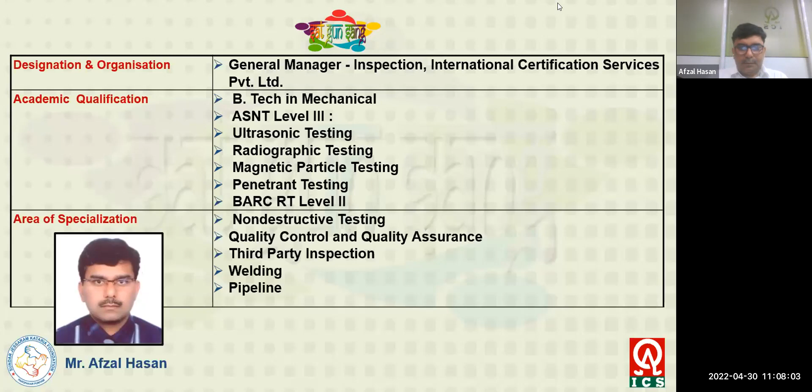Thank you for giving the introduction. I'm presenting my PPT. I hope you have my screen. Yes, yes.

Welcome to the session on introduction to the Static and Mobile Pressure Vessel Rule 2016, SMPV Rule 2016. As per the SMPV Rule 2016, the pressure vessel definition is defined.

Pressure vessel means any closed metal container of whatever shape intended for storage or transport of any compressed gas, which is subjected to internal pressure and whose water capacity exceeds 1,000 liters, and includes interconnecting parts and components thereof up to the first point of connection to the connected piping and fittings.

So this is the definition. The pressure vessels falling under this rule means vessels with less than 1,000 liter capacity do not fall under the SMPV Rule 2016.

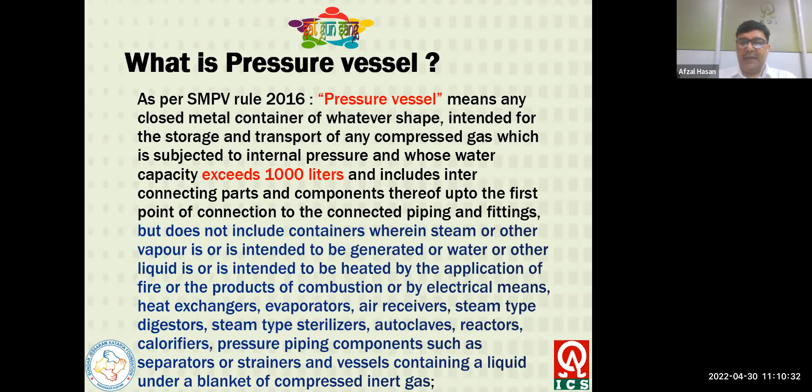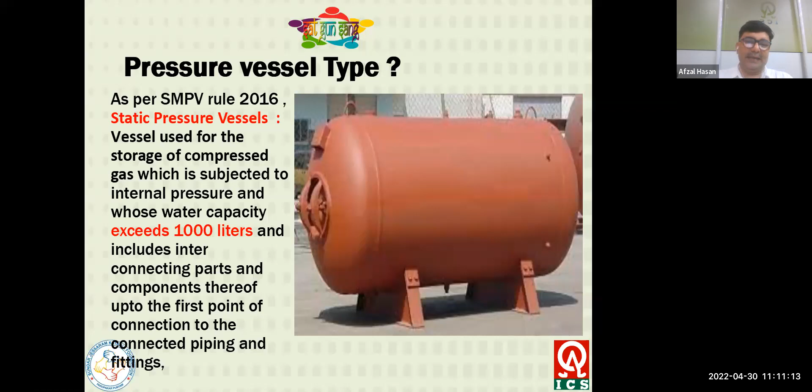Types of pressure vessels: as per the SMPV Rule 2016, these are basically categorized into static pressure vessels and pressure vessels used for transportation. The static pressure vessel is used for storage of compressed gas, subjected to internal pressure, whose water capacity exceeds 1,000 liters, and includes interconnecting parts and components thereof up to the first point of connection to the connected piping and fittings. This relates to static pressure vessels.

Mobile pressure vessels: every vessel used for transportation of compressed gas is a mobile pressure vessel. Pressure vessel types: there are four most common pressure vessels based on shape - cylindrical, spherical, and horizontal and vertical pressure vessels.

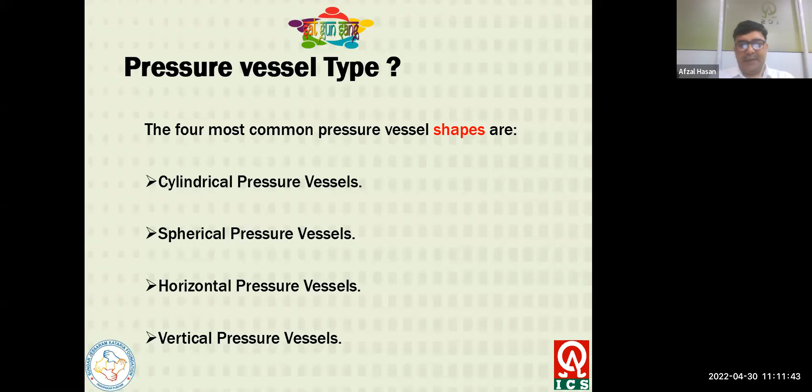Another type based on shape and design is called mounded bullets. Mounded bullets are horizontal pressure vessels intended for the pressurized storage of liquid petroleum gas at ambient temperature.

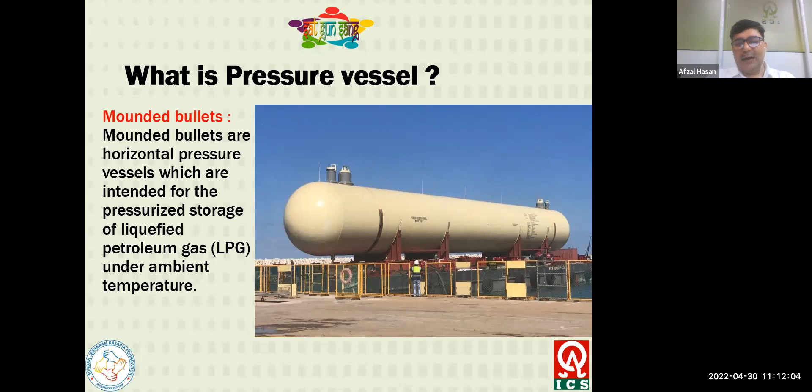Horton sphere: the Horton sphere is a spherical pressure vessel used for storage of compressed gas such as propane, liquid petroleum gas, or butane in the liquid gas stage.

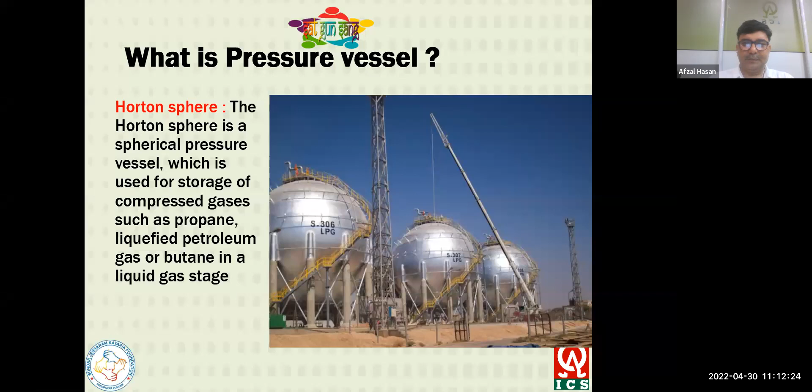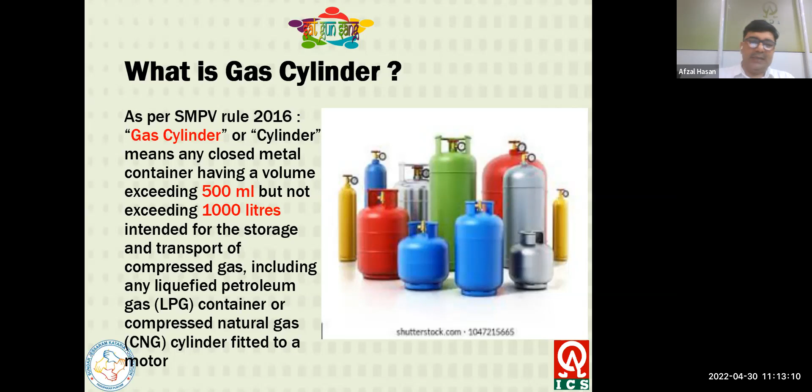What is the cylinder? As per the SMPV rule 2016, they have differentiated between the gas cylinder and the pressure vessel. The rule defines what falls under the gas cylinder and what falls under the SMPV rule 2016. Gas cylinder means any closed metal container having a volume exceeding 500 milliliters but not exceeding 1000 liters, intended for the storage and transport of compressed gas, including any liquefied petroleum gas container or compressed natural gas cylinder fitted to a motor vehicle. So this is the differentiation between the pressure vessel and gas cylinder.

What is a cryogenic pressure vessel? According to the SMPV rule 2016, cryogenic pressure vessel means a pressure vessel intended for storage and transportation of cryogenic liquid, and includes cold converters, vacuum insulated evaporators, vacuum insulated storage or transport tanks, and thermosiphon tanks, and includes a permanently installed cryogenic pressure vessel of 1000 liter water capacity or less for storage of cryogenic liquid.

What is cryogenic liquid? It means a liquid form of a permanent gas having a normal boiling point below minus 150 degrees centigrade. So a cryogenic liquid that evaporates below minus 150 degrees centigrade is called cryogenic liquid. Examples: nitrogen, helium, hydrogen, argon, methane, and carbon monoxide are examples of cryogenic liquid.

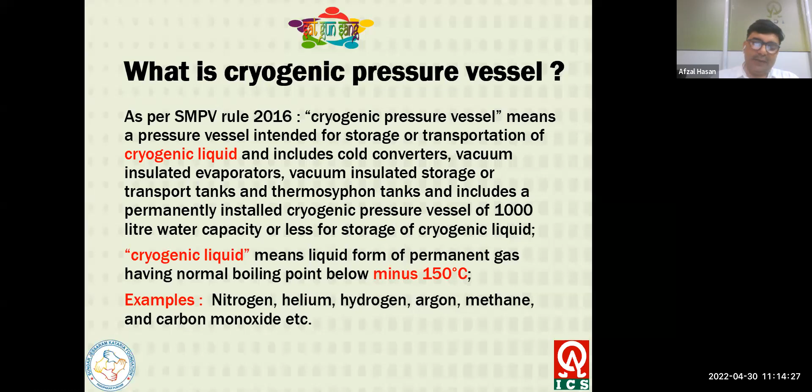Vacuum insulated vessels are used for the storage and transportation of cryogenic liquids. Basically, insulation is provided by a vacuum between the two shells. The inner shell is the storage vessel and the outer shell provides shielding to prevent heat transfer, restricting heat.

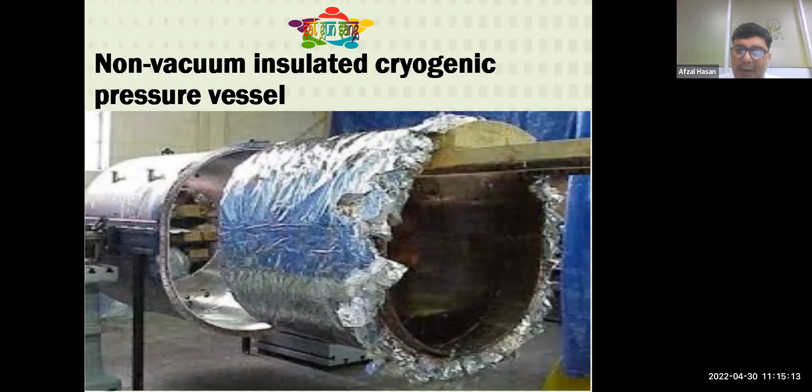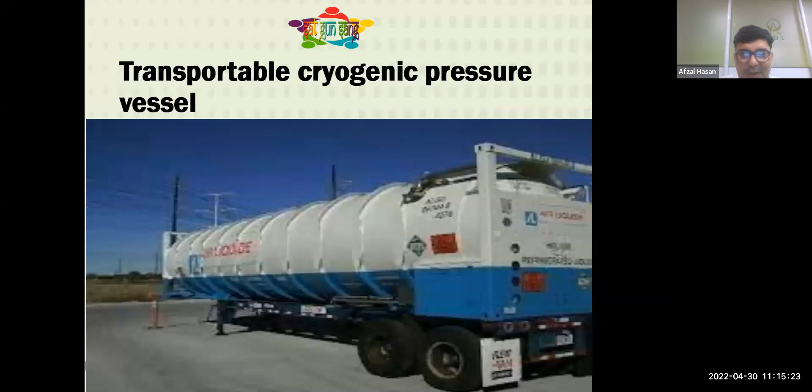Non-vacuum insulated vessels have insulation material provided on the inner and outer vessels. Static vertical cryogenic pressure vessels and transport cryogenic pressure vessels are other types.

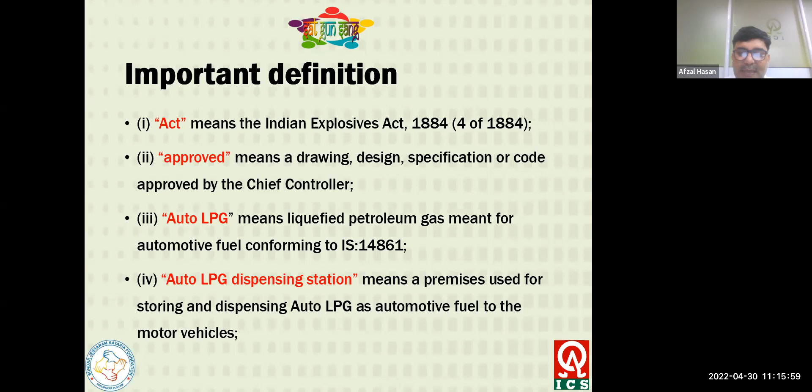Important definitions given in the SMPV rule 2016: Act means the Indian Explosive Act 1884. Approved means the drawing, design, specification, or code approved by the Chief Controller. Auto LPG means liquefied petroleum gas meant for automotive fuel, conforming to IS 14861. Auto LPG dispensing unit stations mean premises used for storing and dispensing auto LPG as automotive fuel to motor vehicles.

As per the SMPV rule 2016, compressed gas is defined as any permanent gas, liquefied gas, or cryogenic liquid under pressure, or gas mixture, which in a closed pressure vessel exerts a pressure exceeding 1 atmospheric gauge pressure at the maximum working temperature, and includes hydrogen fluoride. In case of a vessel without insulation or refrigeration, the maximum working temperature shall be considered as 55 degrees centigrade. This means if the working temperature of the gas stored in the vessel is more than 55 degrees centigrade, it does not fall under this rule.

Critical temperature means the temperature above which the gas cannot be liquefied by application of pressure alone. Cryogenic liquid means liquid form of a permanent gas having a normal boiling point below minus 150 degrees centigrade.

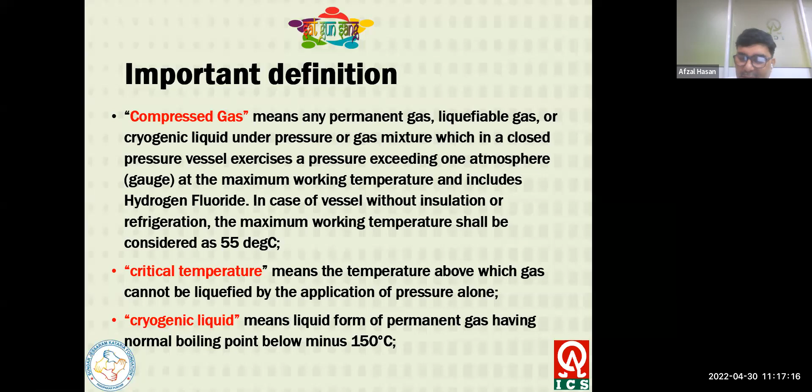Restriction on filling, manufacture and import of the pressure vessel, including fittings and vaporizers: No person shall fill any compressed gas in any vessel, or transport any vessel filled with compressed gas, unless such vessel has been manufactured in accordance with the type, standard, or code specified under Rule 13, and fitted with fittings approved by the Chief Controller.

No person shall manufacture any vessel and its fittings under sub-rule 1, including vaporizers, without prior approval of the Chief Controller. Any person seeking approval of his fabrication shop for fabrication of pressure vessels, vaporizers, or fittings under the sub-rule must follow the restrictions on filling and manufacturing.

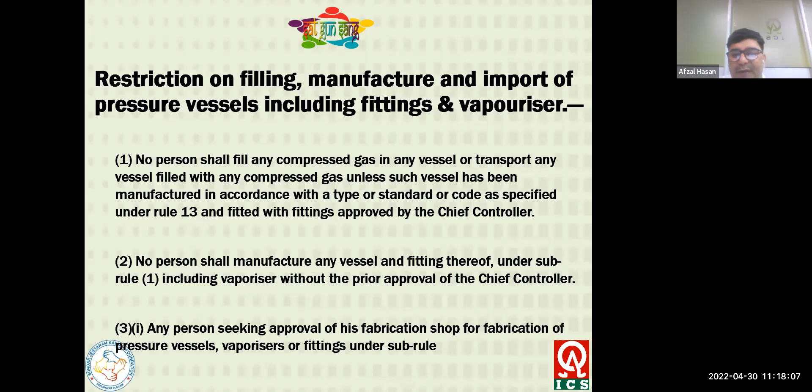Restriction on filling and manufacturing import of pressure vessel, including fitting and vaporizer, shall submit particulars specified in Appendix First to these rules, a copy of ISO certification or equivalent certification in respect of the fabrication shop, and the scrutiny fee specified in clause B of the schedule.

The Chief Controller, on receipt of documents mentioned in clause 1, shall get the fabrication shop inspected by the controller for assessment of capability for fabrication of pressure vessels and vaporizer fittings, and shall either approve the shop or reject the application depending upon the assessment report. The approval shall remain valid initially for a period of 1 year. No person shall import any vessel without prior approval from the Chief Controller.

Restriction on delivery and dispatch. No person shall deliver or dispatch any compressed gas filled in the vessel to any person other than the holder of storage license issued under these rules, or to a port authority or railway administration. No compressed gas delivered or dispatched under this sub-rule shall exceed the quantity which the person to whom it is delivered or dispatched is authorized to store under the license held by him.

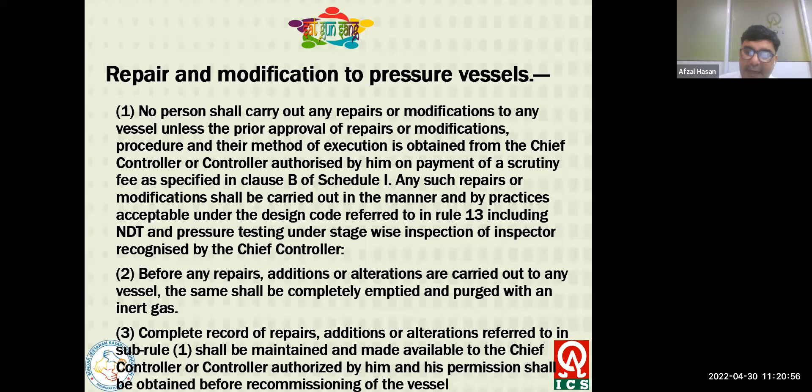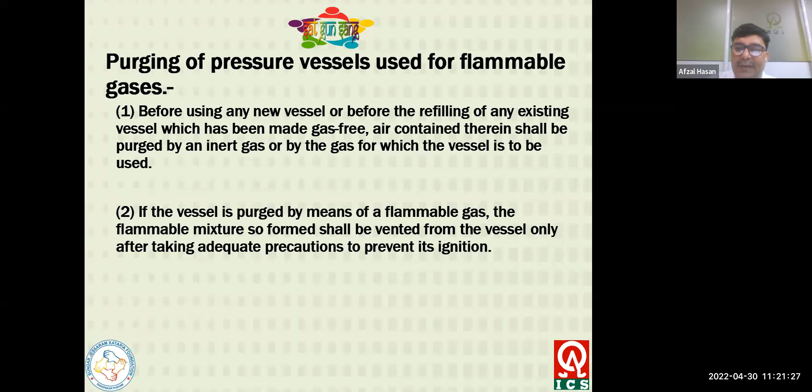Purging of the pressure vessel for use with flammable gases. Before using any new vessel, or before refilling any existing vessel which has been made gas free, the air contained therein shall be purged by inert gas or by the gas for which the vessel is to be used. If the vessel is purged by means of flammable gas, the flammable mixture so formed shall be vented from the vessel only after taking adequate precautions to prevent ignition.

Prohibition of employment of children and intoxicated persons. No person under the age of 18 years, or who is in a state of intoxication, shall be employed for the loading, unloading, or transport of any vessel containing compressed gas, or in any premises licensed under these rules.

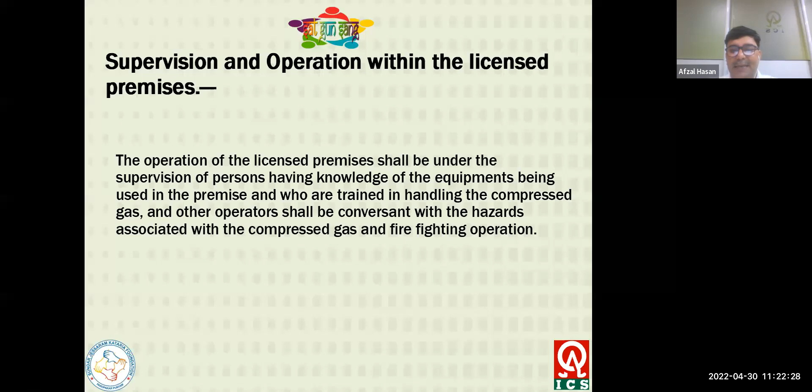Supervision and operation within the licensed premises. Operations of licensed premises shall be under the supervision of persons having knowledge of the equipment being used in the premises and who are trained in handling compressed gas. Other operators shall be conversant with the hazards associated with compressed gas and firefighting operations.

Special precautions against accidents. No person shall smoke, bring any matches or fire or articles capable of causing ignition, or commit or attempt to commit any act which may tend to cause fire or explosion, in or about any place where compressed gas is stored, handled or transported in vessels.

All empty vessels which had contained any flammable or toxic gases shall, except when opened for purpose of filling, cleaning, or rendering them gas free, be kept securely closed until they have been cleaned and freed of the gas, as the case may be.

Every person storing compressed gas in a vessel, and every person in charge of or engaged in the storage, handling, or transportation of such gas in the vessel, shall at all times comply with the provisions of these rules and conditions of any license issued thereunder, observe all precautions for the prevention of accident by fire or explosion, and prevent any person from committing any act referred to in this rule.

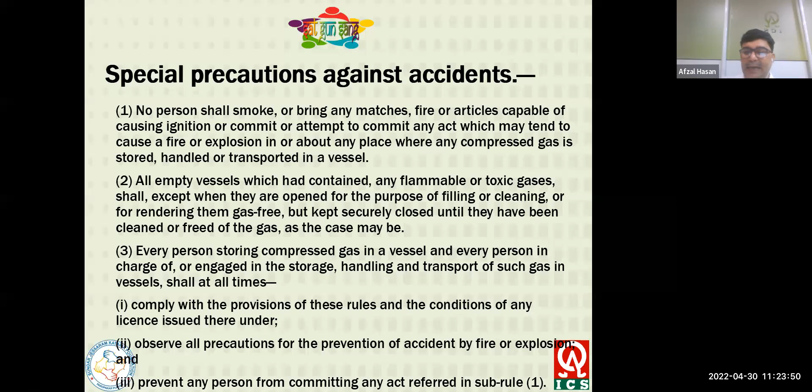Design code of the pressure vessels. Vessels shall be designed, constructed, and tested in accordance with IS 2825, ASME Section 8 Division 1, Division 2, PD 5500, EN 13458 and EN 13530, AD 2000, as the code is amended from time to time, or such other standard or code accepted by the Chief Controller.

A test and inspection certificate issued by the inspector and countersigned by the approved fabricator, in the prescribed format, stating that the vessel meets the requirements of the standard or code referred to in sub-rule 1, shall be furnished to the Chief Controller or controller authorized by the Chief Controller.

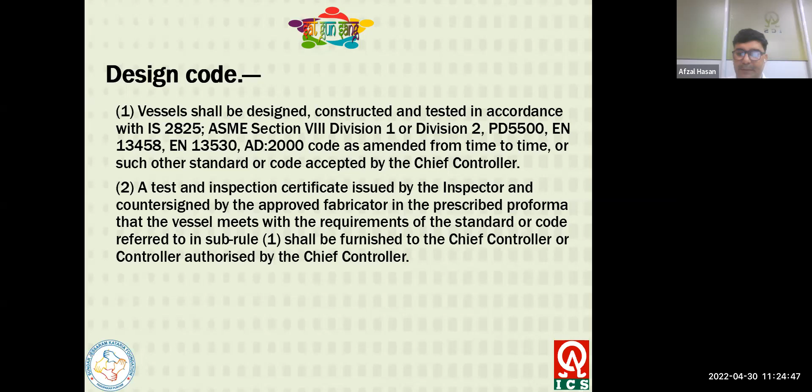Design pressure of the vessel shall not be less than the vapor pressure of the gas in the vessel at 55 degrees centigrade, or the developed pressure of the gas in the vessel at 55 degrees centigrade if the vessel is meant for storage of permanent gas, or the maximum allowable service pressure with additional allowances for vacuum, static head, and stresses due to acceleration or deceleration, as the case may be, in respect of cryogenic liquid proposed to be stored or transported.

Static head of the water column or compressed gas column shall also be considered for the static pressure vessels. Wind load and seismic load shall also be considered for vertical cylindrical vessels and Horton spheres.

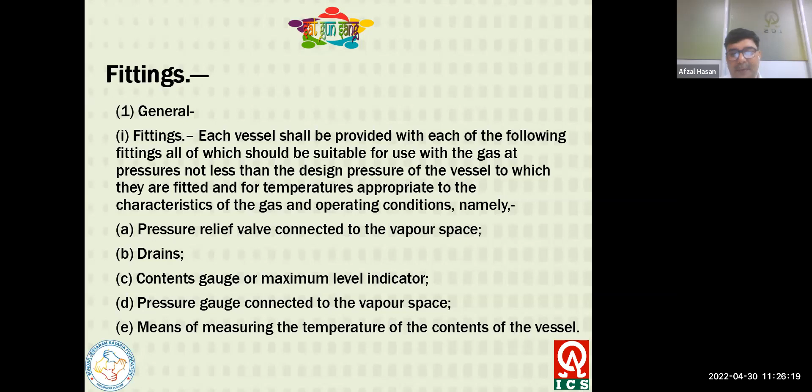Fittings: each vessel shall be provided with each of the following fittings, all of which should be suitable for use with gas at a pressure not less than the design pressure of the vessel to which they are fitted, and temperature appropriate to the characteristics of the gas and operating condition, namely pressure relief valve connected to the vapor space, drains, content gauge or maximum level indicator, pressure gauge connected to the vapor space, and means to measure the temperature of the content of the vessel.

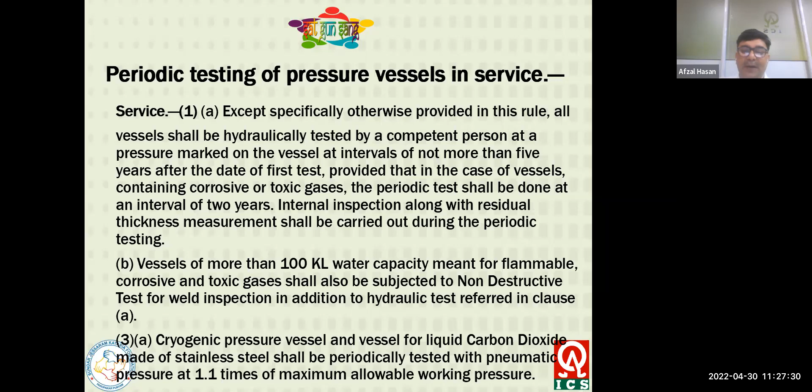Periodic testing of the pressure vessel in service stage. Except where specifically otherwise provided in this rule, all vessels shall be hydraulically tested by a competent person at a pressure marked on the vessel at an interval of not more than 5 years after the date of first test, provided that in the case of vessels containing corrosive or toxic gases, periodic tests shall be done at intervals of 2 years. Internal inspection along with residual thickness measurement shall be carried out during the periodic testing. Vessels of more than 100 kL water capacity meant for flammable, corrosive and toxic gases shall also be subjected to non-destructive testing for weld inspection in addition to the hydraulic test referred to in this clause. Cryogenic vessels, pressure vessels, and vessels for liquid carbon dioxide made of stainless steel shall be periodically tested by pneumatic pressure at 1.1 times the maximum allowable working pressure.

Periodic testing of the pressure vessel in service. Carbon dioxide storage and transport vessels made of carbon steel shall be subjected to hydraulic testing instead of pneumatic testing at the marked test pressure as per the design and fabrication code. It shall be ensured that the vessel, after testing, is thoroughly dried of water and made moisture free before being taken into service. Ammonia Horton sphere shall be subjected to first periodic inspection after 2 years of its installation, and the inspection shall consist of detailed non-destructive testing of the vessel. Second periodic inspection shall be carried out after 3 years of the first inspection, and shall involve non-destructive testing and hydro testing of the sphere.

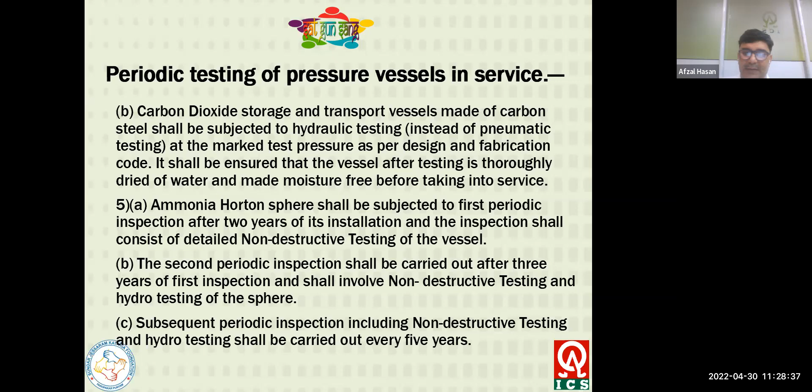Subsequent periodic inspection, including non-destructive testing and hydro testing, shall be carried out every 5 years. Notwithstanding anything mentioned in clause A of rule 3, 4, 5 above, the licensee is at liberty to carry out the hydraulic test as per the design code during the periodic inspection under rule 19. A competent person shall carry out the test as required under sub-rule 1 to sub-rule 6, and shall issue the online certificate of the test in the prescribed format, along with all the annexures giving the details of the NDT inspection prescribed above.

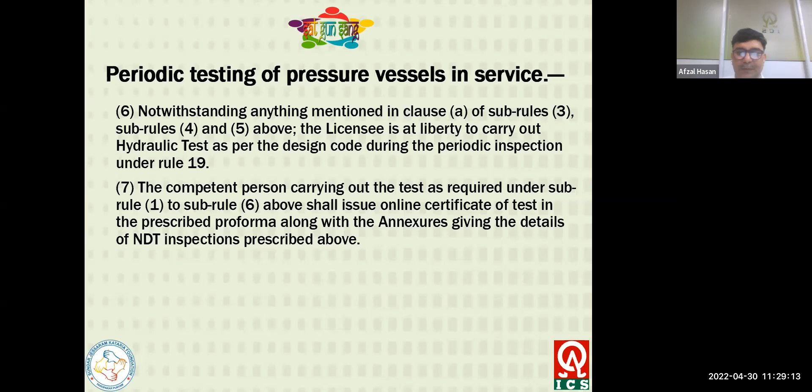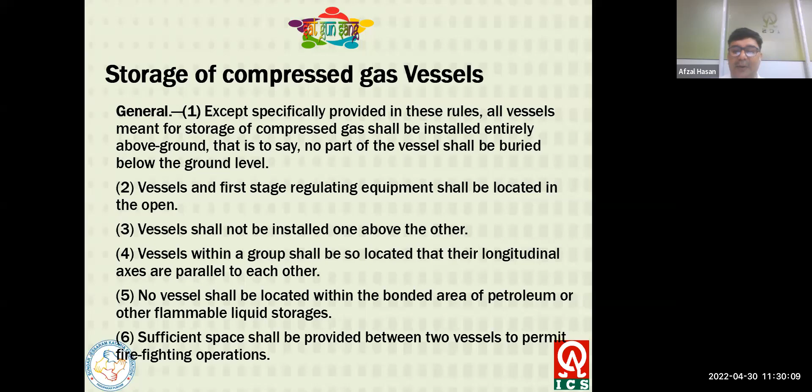Storage of compressed gas vessels - general requirements. Except where specifically provided in these rules, all vessels meant for storage of compressed gas shall be installed entirely above ground, that is to say, no part of the vessel shall be buried below ground level. Vessel and first stage regulating equipment shall be located in the open. Vessels shall not be installed one above the other. Vessels within a group shall be so located that their longitudinal axes are parallel to each other. No vessel shall be located within the bunded area of petroleum or other flammable liquid storages. Sufficient space shall be provided between two vessels to permit firefighting operations. Two or more vessels installed in batteries shall be so installed that the top surfaces of the vessels are on the same plane.

Vessels with their dished ends facing each other shall have a screen wall between them. Notwithstanding anything contained in rules 1 to 8 above, vessels for storage of liquefied petroleum gas (LPG) and other liquefied compressed gases can be placed underground, covered by earth, conforming to national or international standards acceptable by the Chief Controller and the requirements specified in Schedule 3. Above ground vessels for storage of corrosive, flammable, or toxic gas in the liquefied state shall be provided with an enclosure wall all around the ground. Minimum separation distance between the vessel and sump shall be the diameter of the vessel in case of a vessel with water capacity not exceeding 40,000 liters, or 15 meters if the water capacity of the vessel exceeds 40,000 liters. A corrosion allowance of minimum 1.5 mm shall be provided for vessels made of carbon steel.

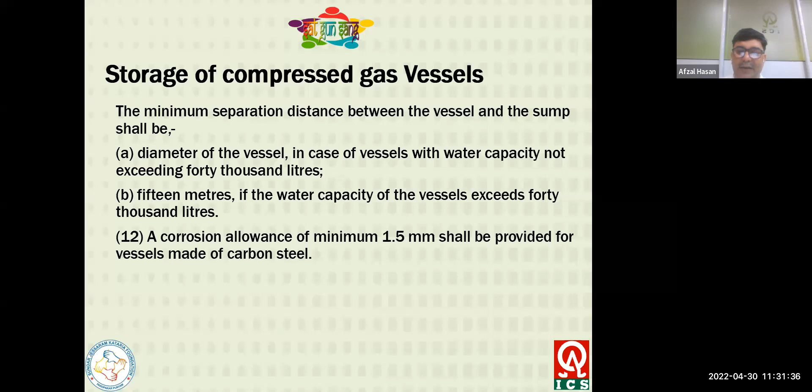Minimum safety distance for non-corrosive and non-flammable or non-toxic gases. Water capacity in liters not above 1,000 liters. Minimum distance from the building or group of buildings or line of adjoining properties should be 5 meters, and minimum distance between the pressure vessels shall be 1 meter.

If the capacity is more than 1,000 liters and less than 10,000 liters, the interdistance between the building and pressure vessels should be 10 meters, and minimum distance between the vessels should be 1 meter. If the capacity of the vessel is more than 10,000 to 20,000 liters, minimum distance should be 15 meters between the building and pressure vessels, and between the vessels should be 1.5 meters.

If the capacity is more than 20,000 and less than 40,000, the interdistance between the building and the pressure vessels shall not be less than 20 meters, and the distance between the pressure vessels should be minimum 2 meters, not less than 2 meters. Above 40,000 liters capacity, the interdistance between the building and pressure vessel should be 30 meters, and the interdistance between vessels should be minimum 2 meters.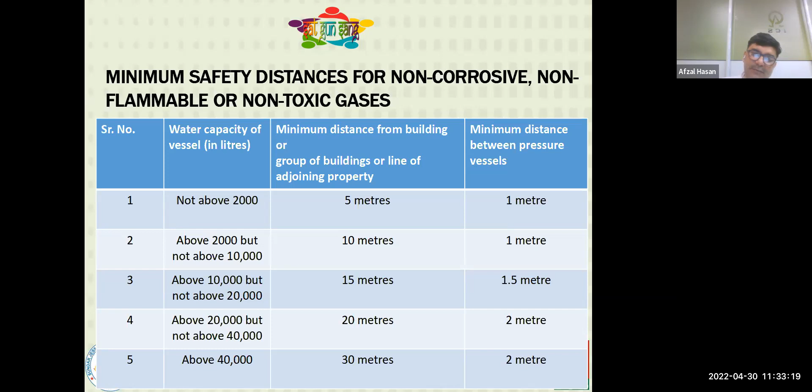This is another table related to the minimum safety distance for non-corrosive, non-flammable or non-toxic gases. This table talks about the same method: capacity, interdistance between the building and vessels, and distance between the pressure vessels. For storage capacity up to 2,000 liters, the minimum interdistance between the building and vessel should be 5 meters, and interdistance between the pressure vessels should be 1 meter. Above 2,000 liters to 10,000 liters, interdistance between the building should be 10 meters, and minimum distance between vessels should be 1 meter.

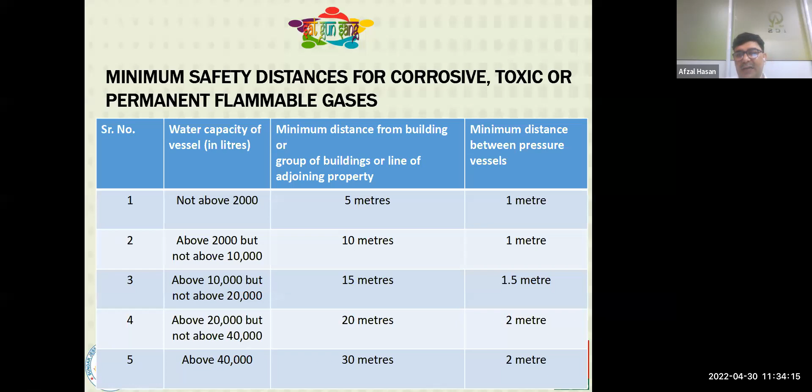So this table talks about the interdistances between the building and between the pressure vessels based on the capacity for corrosive and toxic or permanent flammable gases.

This table talks about the safety distances required for liquefied flammable gases according to capacity. Up to 2,000 liters, minimum distance from the building or group of buildings or line of adjoining properties: if the vessel is above ground, the interdistance should be 5 meters. If the vessel is above ground or underground but mounted, the interdistance can be reduced up to 3 meters, not less than 3 meters. So based on above ground and mounted, they have categorized it into two categories. Interdistance has been reduced when mounting is provided.

Minimum distance between the pressure vessels is accordingly categorized in two methods, based on above ground and based on mounting provided, whether above ground or underground. So the interdistance has been reduced where mounting is provided.

For above ground vessel capacity above 2,000 liters but not above 7,500 liters, the above ground vessel interdistance should be 10 meters for any building or adjoining properties, or if the pressure vessel is mounted, the interdistance can be reduced up to 3 meters. Accordingly, the interdistance between pressure vessels shall be 1 meter, whether above ground or mounted.

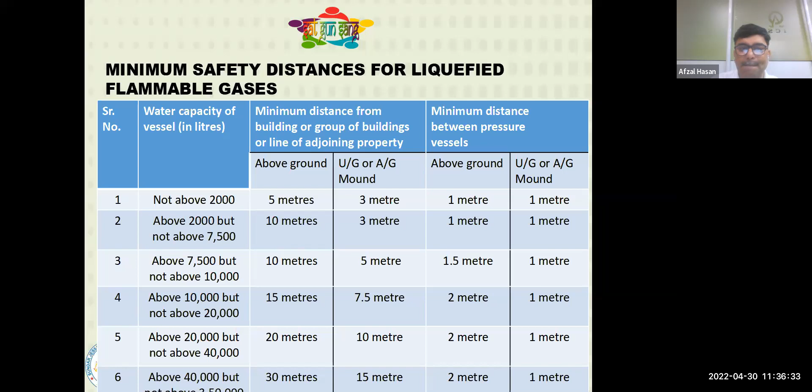Minimum safety distances between facilities associated with the storage of liquefied flammable gas in the petroleum refinery, gas processing plant, storage terminal, and bottling plant. They have given Table 4 according to the capacity, interdistance between the buildings, and interdistance between equipment to equipment, covering all facilities. So Table 4 talks about the required minimum interdistances for safety.

Table 5, mentioned in the rule 2016, gives the minimum safety distance in meters between the facility associated with the storage and dispensing of liquefied petroleum gas in the liquefied petroleum gas dispensing station, as automotive fuel to the motor vehicle. So this table talks about the interdistance required between facilities provided at LPG dispensing stations.

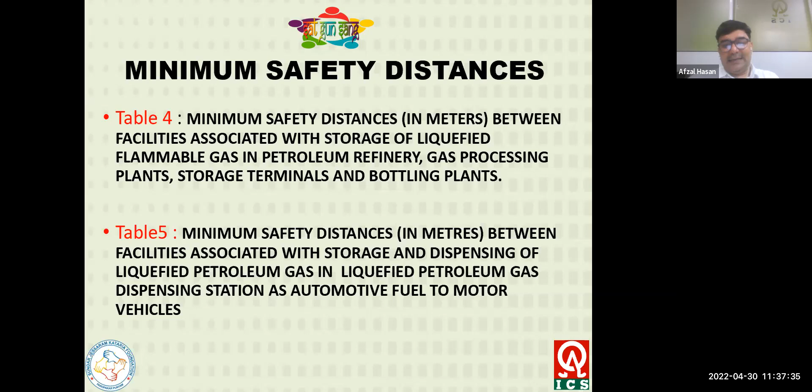Table 6 talks about the minimum safety distance for non-flammable, non-toxic cryogenic liquid and liquid nitrogen oxide. Table 7 gives the minimum safety distance for liquid carbon dioxide. So these numbers of tables are defined in the SMPV rule 2016 for safe distances.

Earthing requirement for the pressure vessels. All vessels used for the storage of flammable compressed gas shall be electrically connected with the earth in an efficient manner. Pipelines conveying the flammable liquid shall be adequately prepared for electrical continuity and connected with the earth in an efficient manner.

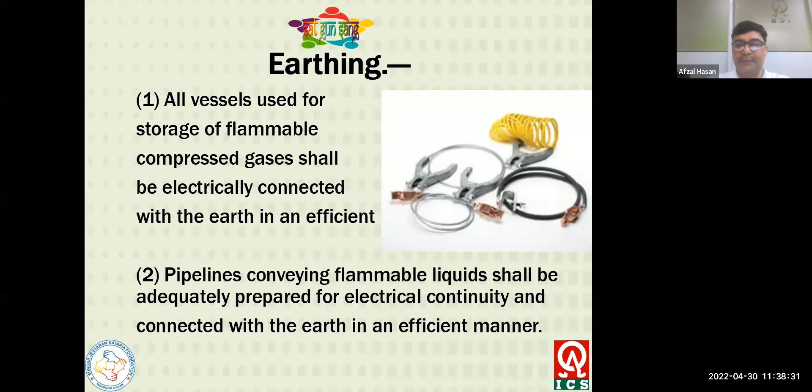Fire protection requirement: all vessels used for the storage of flammable compressed gases shall be protected against fire hazards. Provision shall be made for the adequate supply of water for fire protection in the storage area, in accordance with the rules and regulations applicable in the area.

Application of water may be by hydrant, hose and mobile equipment, fixed monitor or fixed spray system, which may be automatic. Control of water flow should be possible from outside any dangerous area. The firefighting system shall be designed with the medium velocity. Sprinklers for above ground storage vessels, filling sheds, loading and unloading areas, and pump sheds shall have a minimum spray density of 10 liters per minute per square meter for the single largest risk area, with additional requirement for hydrant points.

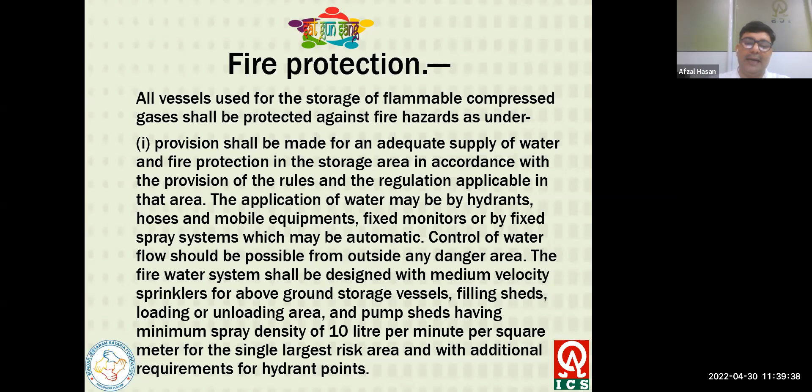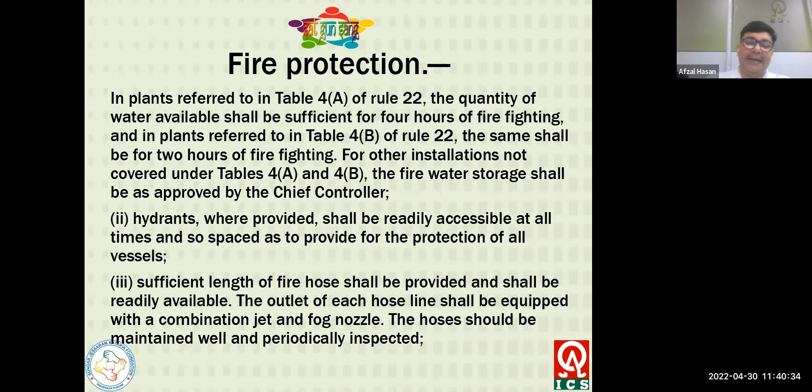The fire water storage shall be approved by the chief controller. Where provided, hydrants shall be readily accessible at all times, so spaced as to provide protection for all vessels. Sufficient length of fire hose shall be provided and shall be readily available. The outlet of each hose line shall be equipped with a combination of jet and fog nozzles, and the hose should be well maintained and periodically inspected.

Mobile equipment, fixed monitors or fixed spray systems shall be designed to discharge water at a rate sufficient to maintain an adequate film of water over the surface of vessel supports under fire conditions. Consideration shall be given to the provision of mobile or fixed water spray systems giving suitable and effective protection for vehicle loading and unloading areas.

At least 2 dry chemical powder type fire extinguishers of 9 kg capacity each shall be installed at each point of access to the installation. In a liquefied petroleum gas dispensing station for filling motor vehicles having only underground and earth covered mounted LPG storage vessels, 2 units of 70 kilogram dry chemical type fire extinguishers shall be provided. This is the requirement for auto LPG dispensing station fueling of motor vehicles.

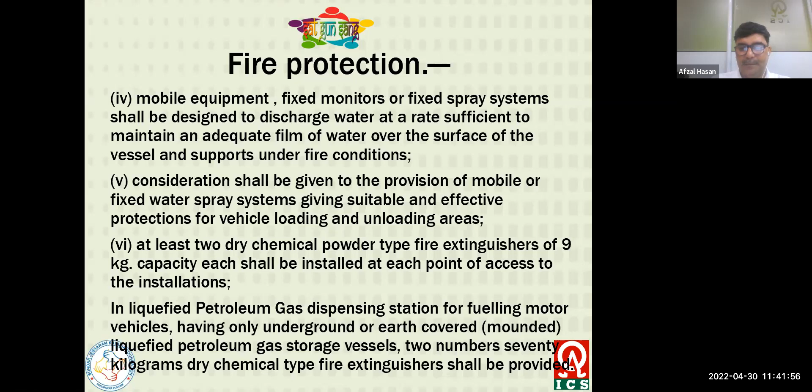Dispenser for auto LPG dispensing station: the dispenser and connected fittings used for dispensing auto LPG in motor vehicles, provided in the auto LPG dispensing station, shall be designed, constructed, tested and maintained in accordance with the requirements laid down in Schedule 2 of this rule, and shall be of a type approved in writing by the chief controller.

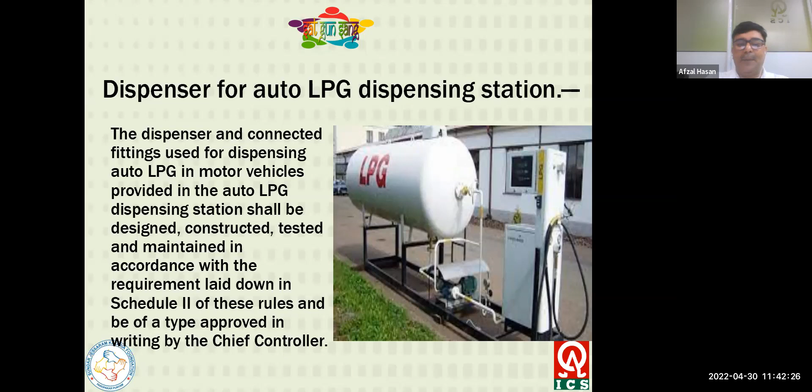Special provision for filling fuel tanks of motor vehicles and unloading of tank trucks in auto LPG dispensing stations: auto LPG shall not be filled in the fuel tank of a motor vehicle while the engine is running. During the period of unloading auto LPG from the tank truck to the storage vessel, operation of dispensing auto LPG to motor vehicles shall not be carried out.

Auto LPG dispensing station storage capacity requirements as per this rule: maximum water capacity of an individual vessel shall be limited to 20 cubic meters. The number of vessels shall not exceed 2 in an installation, and shall be designed for a pressure of not less than 14.5 kg per square centimeter. Not more than 2 unloading road tankers shall be undertaken at the dispensing station per day.

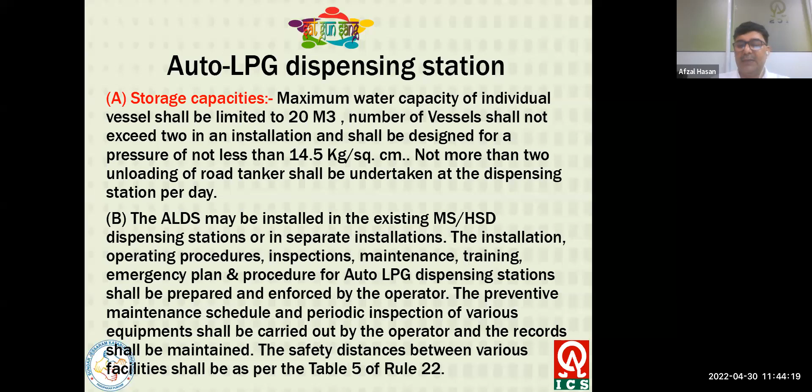Auto LPG dispensing stations may be installed in existing MS and HSD dispensing stations or as a separate installation. Installation, operating procedure, inspection, maintenance, training, and emergency plan procedures for auto LPG dispensing stations shall be prepared and enforced by the operator. Preventive maintenance schedules and periodic inspection of various equipment shall be carried out by the operator and records shall be maintained. Safety distances between the various facilities shall be as per Table 5 of Rule 22, which is applicable for the interdistance between facilities provided at the auto LPG dispensing station.

Mobile tanker unloading for the ALDS shall be done using a hose with automatic closing arrangement on both ends, called the smart hose. This means the inside volume held at both ends should not be vented. They have a provision that if you want to disconnect the hose, it should be closed so that no release of liquid LPG takes place at the end of unloading. Alternatively, loading arms can be provided.

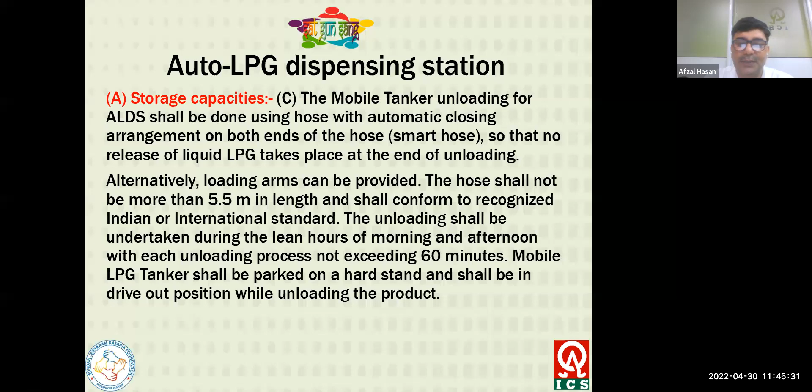The hose shall not be more than 5.5 meters in length and shall conform to recognized Indian or international standards. Unloading shall be undertaken during the lean hours of morning and afternoon, with each unloading process not exceeding 60 minutes. The mobile LPG tanker shall be parked on the hard stand and shall be in the drive-out position while unloading the products.

Suitable provision shall be available for the emergency evacuation of LPG from the underground vessel into the mobile evacuation facility, along with periodic inspection. The tank shall be provided with cathodic protection nozzles on the vessels.

Each vessel shall be provided with 2 circular manholes located on the top of the vessel, having internal diameters of 600 mm and 350 mm respectively.

Level gauge auto LPG tanks should be provided with 1 mechanical type of level gauge. The remote operated valve should be equipped with open and close position indicators, should be of fail-safe design, set to close within a maximum of 30 seconds. That is very important - within 30 seconds, it should operate and close.

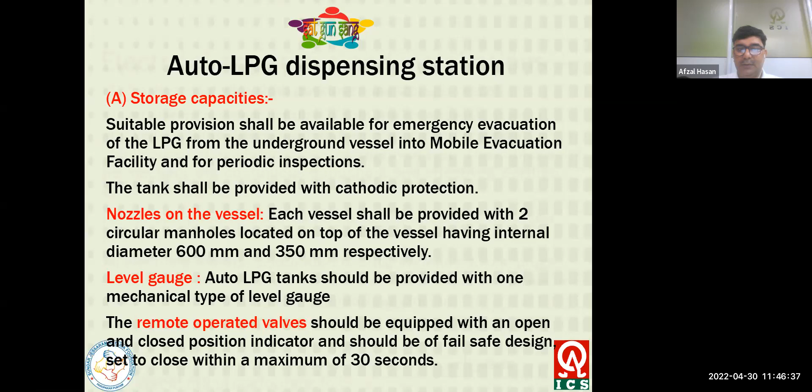Electrical apparatus and installation requirements: No electrical wire shall be passed over storage vessels. All electrical wire installed within the safety zone of any storage vessel for storage of flammable compressed gases shall consist of insulated cable of approved type. The cable shall be mechanically continuous throughout and effectively earthed away from the vessels.

For the pump room, used for pumping flammable compressed gases, all electrical motors, distribution boards, switches, fuses, plugs, sockets, and other instruments shall be of explosion protection construction complying with the requirement of IEC 60079, parts 1 to 11, which provides the requirement for explosive atmosphere equipment protection by flame proof enclosures.

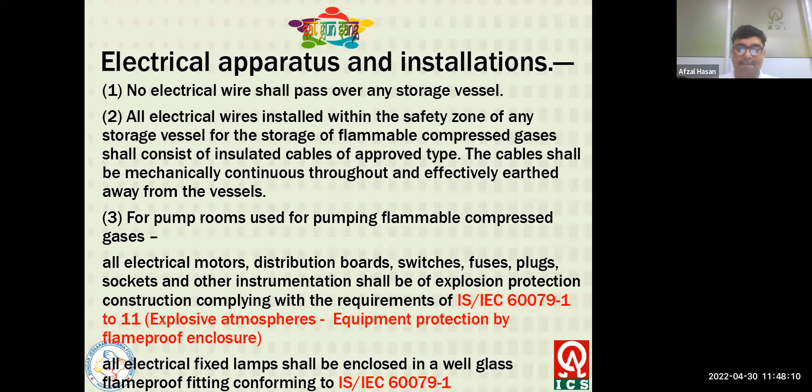Classification of hazardous area for flammable gases: According to the SMPV rule 2016, hazardous area for flammable gas shall be deemed to be classified as a zone 0 area if inflammable gases or vapors are expected to be continuously present in the area.

A zone 1 area is where inflammable gases or vapors are expected to be present under normal operating conditions. If it is continuously present, then it will be zone 0. If it is present under normal operating conditions, it will be categorized as zone 1.

A zone 2 area is where inflammable gas or vapors are expected to be present only under abnormal operating conditions, or failure or rupture of any equipment. If any question arises whether the hazardous area is zone 0, zone 1, or zone 2, the decision thereon of the chief controller shall be final.

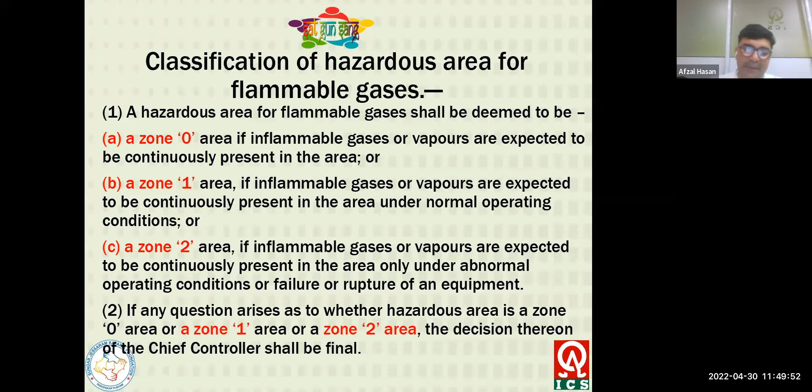Certificate of safety for storage of any compressed gas: Certificate of safety in the form prescribed by the chief controller and signed by the competent person shall be furnished to the licensing authority before any vessel is used for storage of any compressed gas, or whenever any addition or alteration to the installation or foundations for the vessels is carried out.

Now, the vehicle for transport of compressed gas: Every vehicle for transport of compressed gas shall be of the type approved in writing by the chief controller. Every vessel used for transportation of compressed gas shall be constructed and tested in accordance with the requirement of Rule 13, and shall meet the requirement of sub-rules 2, 3, 4, 5, 6, 7 and 8 of this rule. These are additional requirements other than Rule 13.

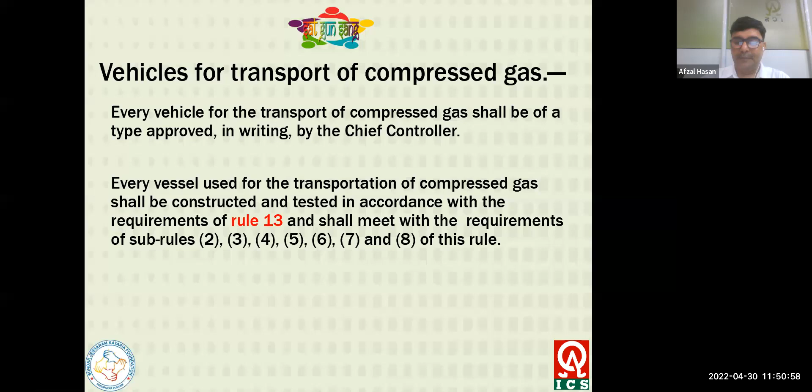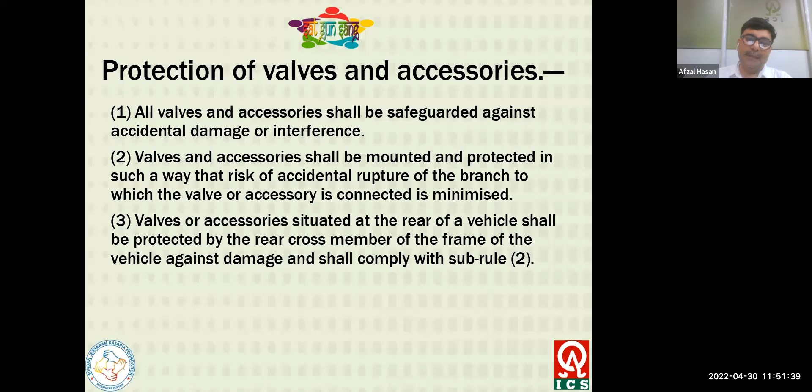Protection of valves and accessories: All valves and accessories shall be safeguarded against accidental damage or interference. Valves and accessories shall be mounted and protected in such a way that the risk of accidental rupture of the branch to which the valve or accessory is connected is minimized. A valve or accessory situated at the rear of a vehicle shall be protected by the rear cross member of the frame of the vehicle against damage, and shall comply with sub-rule 2.

Design safety equipment requirements for the transport vessels. Following requirements shall be complied with in connection with the electrical and anti-static properties of vehicles used for the transportation of compressed gas.

Electrical system shall have the battery in an easily accessible position, with a readily accessible cut-off switch of not less than 300 ampere rating, and wiring fixed and protected so as to minimize accidental damage or undue wear.

The vessel shall be electrically continuous with the chassis, and the vehicle shall be provided with a bonding point or bonding cable. Tires shall be of the anti-static type.

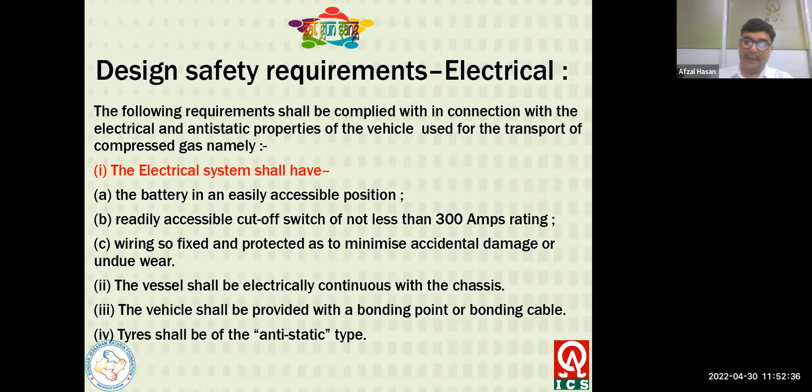There shall be a clear space of at least 15 centimeters between the back of the cab and the front of the vessel. The rear of the vessel shall be protected by a robust steel bumper.

Maximum weight of the liquefied gas for which the vehicle is designed should not exceed the difference between the unladen weight of the vehicle and the maximum gross weight permitted for that class of vehicle under the appropriate transport regulation. A suitable emergency kit should be provided.

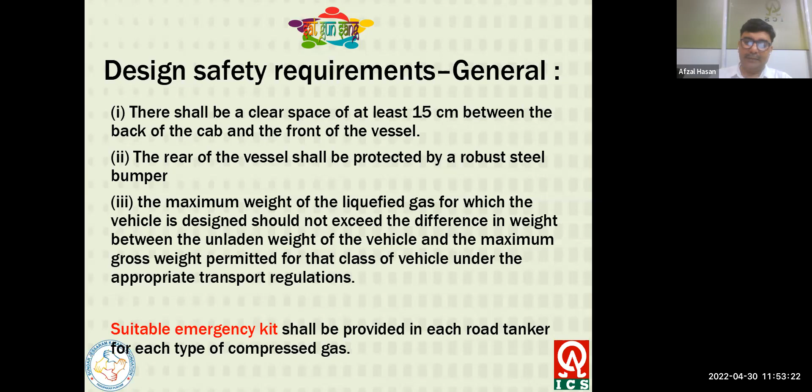There shall be, in each road tanker for each type of compressed gas, a fire protection requirement: 2 serviceable fire extinguishers of suitable size and type shall be provided on each vehicle, 1 on each side, and should be accessible from outside the cab.

A person while in or attending any vehicle conveying flammable gas shall not smoke or use matches or lighters. No fire, artificial light, or article capable of causing fire or explosion shall be taken or carried on a vehicle carrying flammable gases.

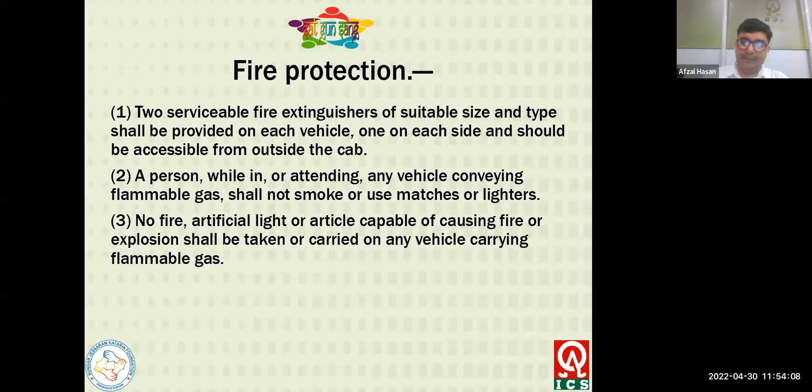Operation requirement: the driver shall be carefully selected and given appropriate training in driving and safe handling of the equipment and the compressed gas carried in the vehicle.

When the loading or discharging of the vehicle takes place within the operator's own premises, a skilled trained person with the requisite knowledge and experience shall be present throughout the operation.

When discharge is in progress at the customer's premises, the driver shall remain within his vehicle, in such a position as to be able to stop the discharge immediately in case of emergency.

Every vehicle shall be constantly attended to by at least 1 person. In the event of an overnight stop away from the home base, prior arrangements shall be made for the safe parking of the vehicle overnight.

In any emergency, the driver may seek the cooperation of the local police in finding a suitable parking facility for his vehicle.

A certificate of safety for the vehicle used for transportation of any compressed gas, in the prescribed format, designed by and signed by the competent person, shall be furnished to the licensing authority before any vehicle is used for the transportation of any compressed gas, to the effect that the vehicle meets the provisions of the rules in this chapter.

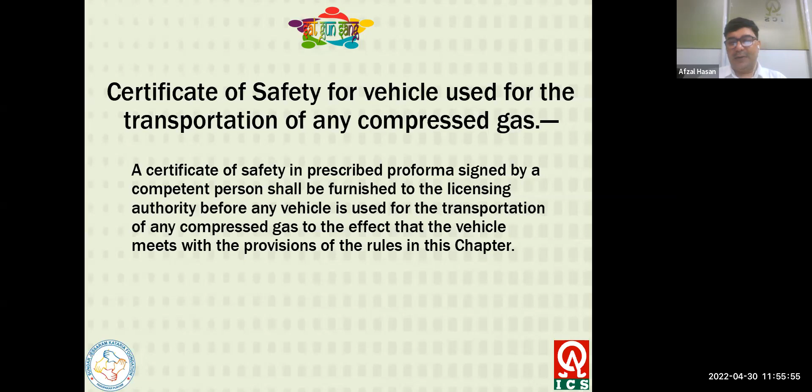License for storage of compressed gas: no person shall store any compressed gas in any vessel except under and in accordance with the conditions of the license granted under these rules.

Prior approval of specification and plans of vessels and premises proposed to be licensed. Every person desiring to obtain a license to store any compressed gas in any vessel shall submit to the chief controller or a controller authorized by him, specifications and plans drawn to scale in triplicate.

These plans shall clearly indicate the manner in which the provisions prescribed in these rules shall be complied with in the premises proposed to be licensed, and the area of which shall be distinctly colored or otherwise marked.

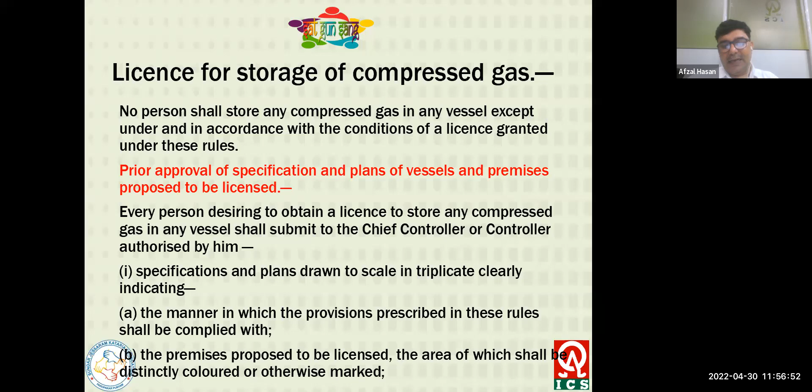This includes the surrounding area lying within 100 meters from the edge of all facilities proposed to be licensed. However, for major installations of flammable or toxic gases including LNG exceeding a total capacity of product of 50 metric tons or 100 cubic meters water capacity of each vessel, whichever is less, the area lying within 500 meters along the hazard

operability study and risk analysis report prepared by a reputed agency.

The position, capacity, material of construction, ground elevation, all vessels, valves and fittings, filling and discharge pumps, firefighting facilities provided, and all other facilities forming part of the premises proposed to be licensed.

Piping and instrumentation diagram for the vessel equipment system proposed to be installed. So this information is to be provided to the authority while applying for the license.

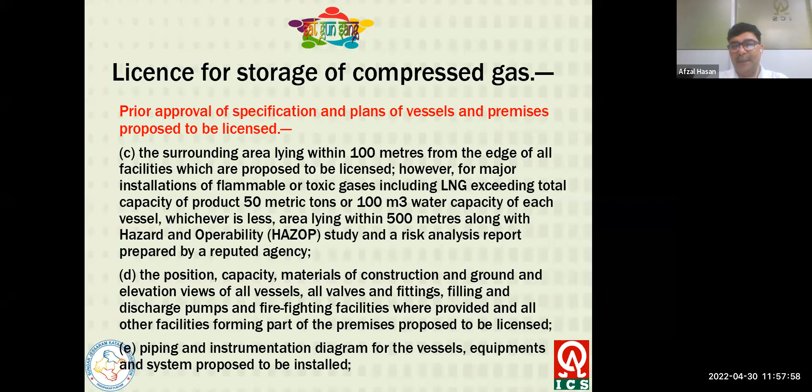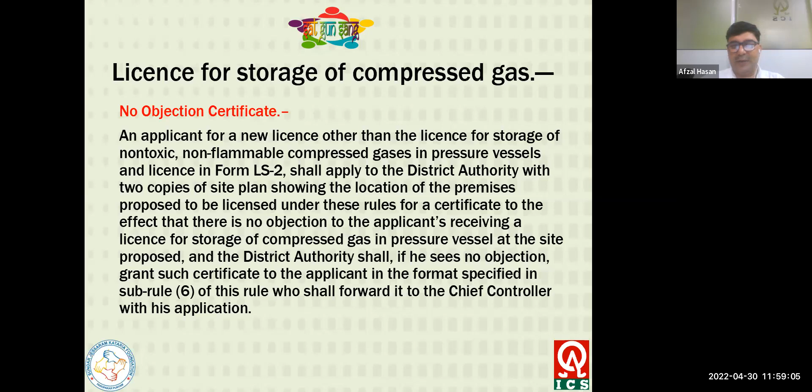No objection certificate is required. An applicant for a new licensee license, other than the license for storage of non-toxic, non-flammable compressed gas in pressure vessels, license in form LS2, shall apply to the district authority with 2 copies of the site plan showing the location of the premises proposed to be licensed. Under these rules, a certificate to the effect that there is no objection to the applicant receiving a license for storage of compressed gas in pressure vessels at the site proposed shall be obtained, and the district authority shall, if it sees no objection, grant such certificate to the applicant in the format specified in rule 6, who shall forward it to the chief controller with his application while applying for licensing for storage of compressed gas vessels.

No compressed gas filled in a vessel shall be transported by vehicle except under and in accordance with the conditions of the license granted under this rule. Nothing in this rule shall apply to the transport of compressed gas filled vessels by railway administrations, so that is not covered in this rule.

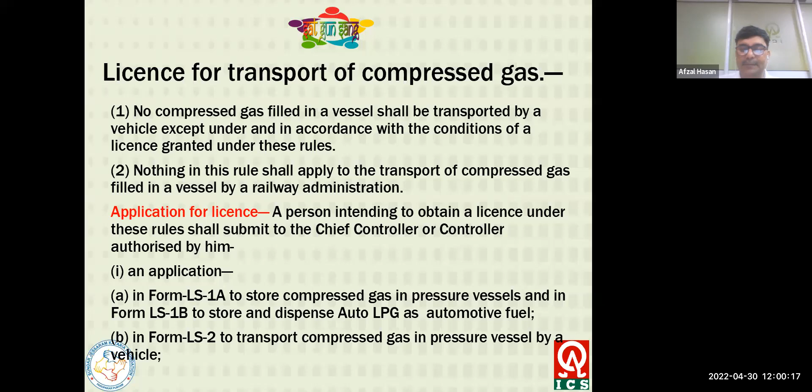Application for license. A person intending to obtain a license under this rule shall submit to the chief controller or controller authorized by him an application in form LS1A to store compressed gas in pressure vessels, and in form LS1B to store and dispense auto LPG as automotive fuel. So different types of formats are given in the rules for applications. Form LS2 is for transporting compressed gas in pressure vessels by vehicles. So these different formats are given for applications.

Form LS3 applies if the application is in respect of permission to import pressure vessels. Form LS3 should be filled and submitted to the authority along with the application, a certificate of safety under rule 33 and rule 43 as the case may be, a test and inspection certificate as per rule 30, 4 copies of drawings for site layout, installation details, vehicle mountings, and as-built vessel design drawings duly endorsed by the inspector shall be submitted. The license fee, no objection certificate from the district authority, and copy of the vehicle registration certificate shall also be submitted.

Power of inspection, search, seizure, detention and removal. This power is given in this notification along with the level of officers and the area of their authority. The chief controller or controller authorized by the chief controller has the authority for inspection, search, seizure, detention and removal of vehicles across the whole of India. All district magistrates, within their respective districts, all magistrates subordinate to the district magistrate within their respective jurisdictions, commissioners of police within their respective jurisdictions, and deputy commissioners of police subordinate to the commissioners of police within the area over which their authority extends. All police officers not below the rank of sub-inspector also have this authority within the area over which it extends.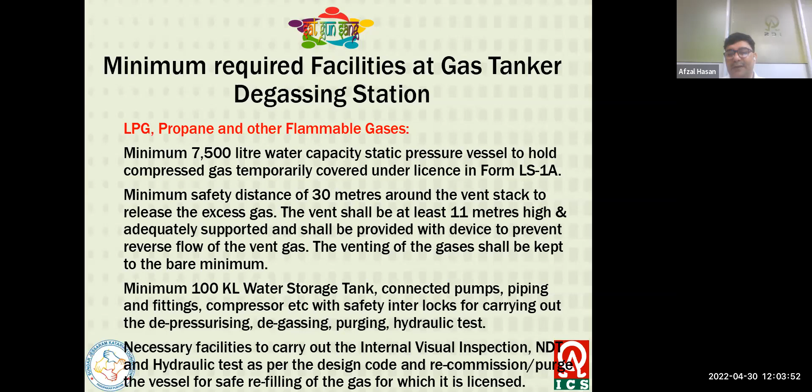Minimum required facility at gas tanker degassing stations for LPG, propane and other flammable gases. The required facility for degassing stations is a minimum 7,500 liter water capacity static pressure vessel to hold the compressed gas temporarily, covered under the license in form LS1A. Minimum safety distance of 30 meters around the vent stack to release excess gas. The vent shall be at least 11 meters high, adequately supported, and provided with a device to prevent reverse flow of the vent gas. Venting of gas shall be kept to the bare minimum. A 100 KL water storage tank, connected pump, piping, fittings, compressor, etc., with safety interlocks to carry out depressurizing, degassing, purging, hydraulic testing, etc., shall be provided at the premises. Necessary facility to carry out internal visual inspection, NDT, hydro test as per the design code, and recommissioning, purging and safe refilling of the gas for which it is licensed shall also be provided.

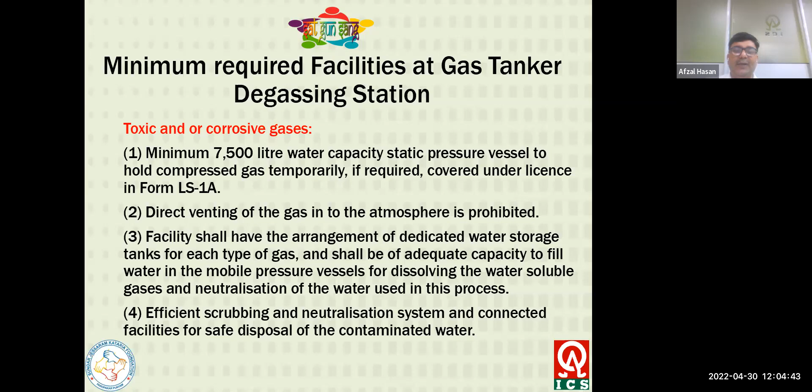Facility required for toxic and corrosive gas tankers: minimum 7,500 liter water capacity static pressure vessel to hold the compressed gas temporarily if required, covered under the license in form LS1A. Direct venting of gas into the atmosphere is prohibited. The facility shall have arrangements for a dedicated water storage tank for each type of gas, with adequate capacity to fill the mobile pressure vessel with water for dissolving water-soluble gases and neutralizing the water used in this process. An efficient scrubbing and neutralization system, with connected facilities for safe disposal of contaminated water, shall be provided.

Some of the accidents are highlighted here, which occurred because of certain failures.

The Cleveland disaster was a major industrial accident at the very first commercial LNG facility built in the United States in 1941. According to a 1944 United States Bureau of Mines report, an LNG holding tank failed and released its contents into the streets and sewers. The vapor cloud ignited and fire engulfed nearby residential and commercial establishments, injuring 225 and killing 131 people.

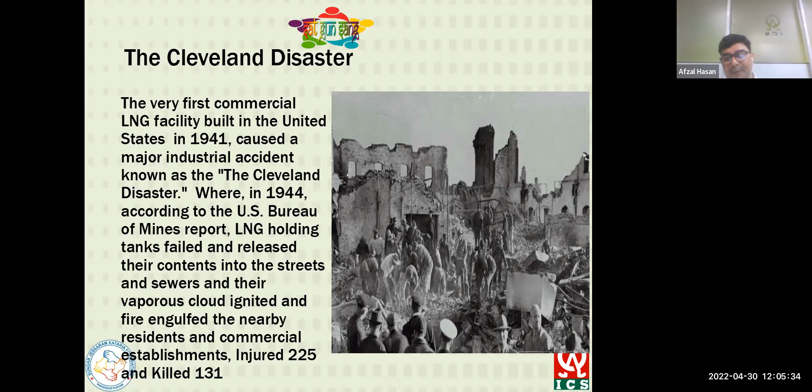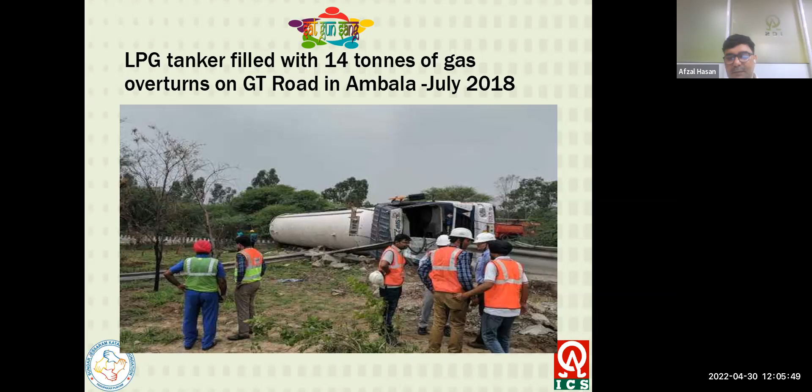An LPG tanker truck toppled on the Uran Fata flyover on the Sion Panvel highway on 13/11/2016. The tanker carrying LPG toppled on the flyover after its wheel got dislocated from the axle, resulting in the tanker truck dropping sideways.

A tanker fire killed people on 28 February 2003, and on 28 February 2017, 3 more died. The busy National Highway 37 was blocked for over 18 hours after an LPG tanker overturned near Rangmati under the Dergaon police station in Golaghat district.

A truck carrying 300 LPG cylinders caught fire in Rajasthan, killing 2 and injuring 4 on 15 August 2021.

There was an explosion and fire due to an LPG tank truck explosion at Kanpur in 2001.

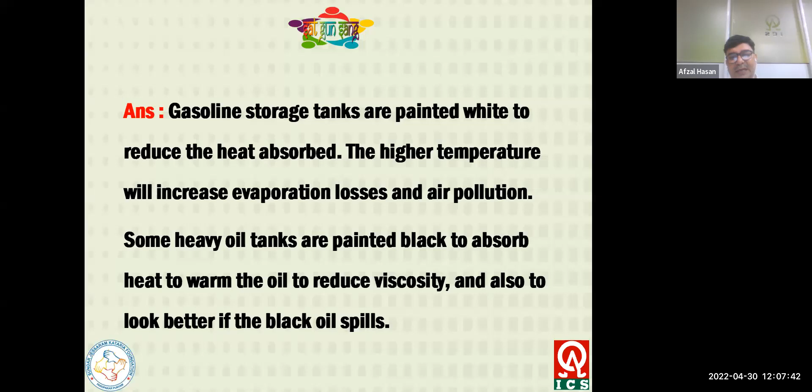Some questions related to this design requirement: why are petrol storage tanks not painted black? The answer is that gasoline storage tanks are painted white to reduce the heat absorbed. Higher temperature increases evaporation losses and air pollution. Some heavy oil tanks are painted black to absorb heat and warm the oil to reduce viscosity, and also so it looks better if the black oil is spilled.

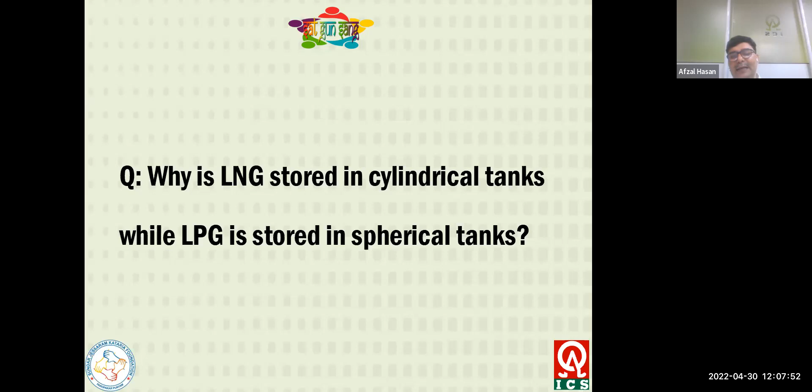Why is LNG stored in cylindrical tanks while LPG is stored in spherical tanks? Let's get the misconception out of the way first. Both gases are stored in tanks shaped as cylinders or spheres, but for different design reasons. LNG is stored and transported at a very low temperature of minus 164 degrees centigrade, so the tank needs to be thermally insulated. Methane cannot be compressed as well as LPG, so it is transported at atmospheric pressure. The least surface area of a storage vessel is a sphere, hence thermal loss is easier to control. However, with cylindrical tanks, a lot of space is wasted between them.

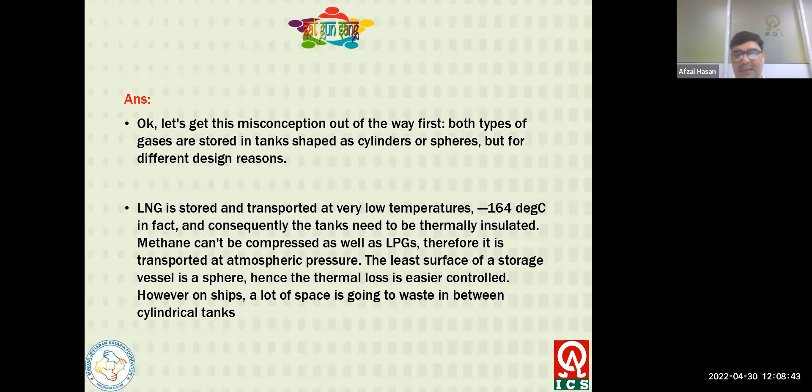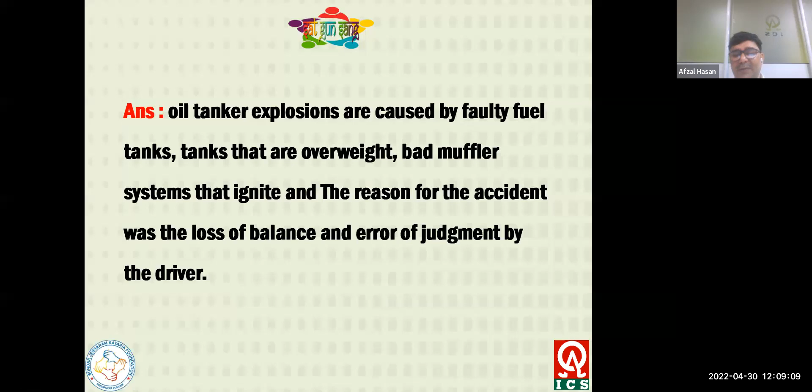What causes the tanker to explode? Basically, oil tanker explosions are caused by faulty fuel tankers and tanks that are overweight, bad muffler systems igniting, and loss of balance and error of judgment by the driver. So there could be a number of reasons.